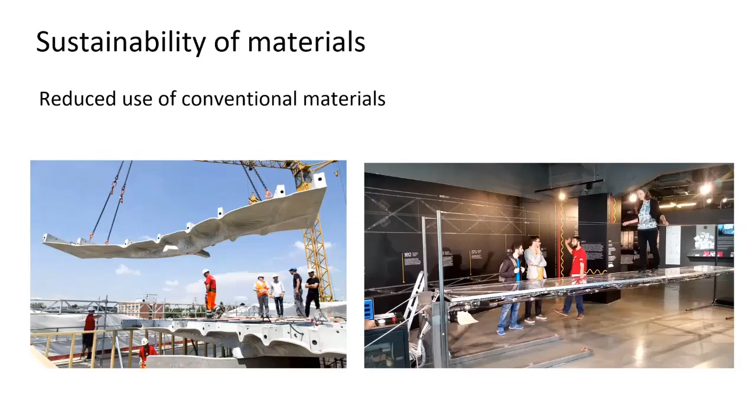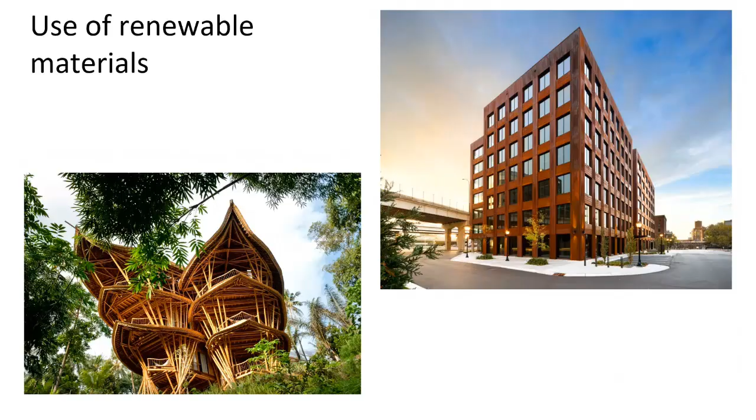So how do we currently design buildings sustainably? Well, we either use reduced use of conventional materials, so trying to design buildings optimally, reducing the amount of concrete and steel that we have in buildings, or we use renewable, sustainable materials, which really comes down to being timber type materials. And timber materials are inherently less stiff than the steel and concrete that we tend to use more of. So the combination of these optimized structures where we're removing material, using the minimum material that we need for strength, and using materials that are inherently less stiff means that structural design is increasingly governed by serviceability considerations rather than ultimate load considerations.

So although structural design is more governed by serviceability, so things like deflections and, more importantly in this context, vibrations, we don't really know what is an acceptable level of vibration. It really depends. As much as standards and guidance writers would like you to believe, there's no one value for what is an acceptable level of vibration. It depends on all sorts of things. It depends on the context, it depends on what you're doing. So someone in a dance studio is going to accept a very different level of vibration to a doctor in a surgery.

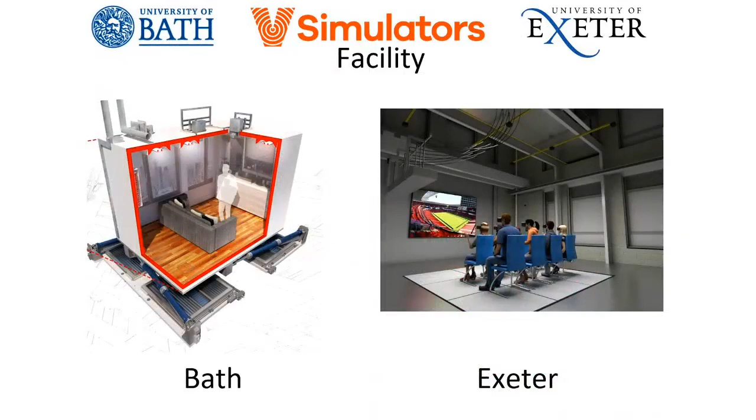So it's context dependent, and that includes the activities that you do, the surroundings, and all sorts of other environmental effects. So that is what VSimulators has been designed to look at, come up with rational design guidance for vibrations and motion in buildings and structures.

So it consists really of two bits of equipment, one bit which is housed at Bath and one bit which is housed at Exeter. And combined, they cover the full range of vibrations and are able to simulate that full range of vibrations that structures and buildings are subject to.

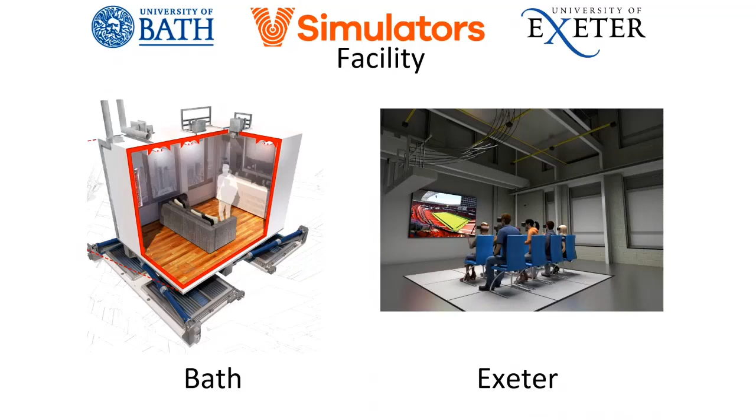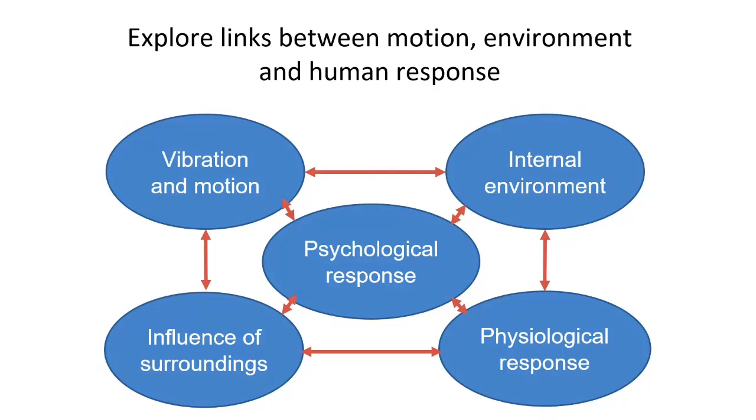And by combining that vibration and motion with aspects of the internal environment, the influence of surroundings that we use virtual reality to simulate, and testing people's psychological and physiological response to those different stimuli, that allows us to see how all these things link together and work out how people actually respond to that motion and vibration, and allow us to assess the acceptability of that vibration.

So I'm going to start off talking about the Bath VSimulator, which is a low frequency, long stroke biaxial motion simulator. So it's a big box on top of it that floats on top of these hydrostatic bearings, and is pushed by big actuators to produce this sort of large amplitude, low frequency vibration. And then that's coupled with an environmental chamber that allows us to control the internal environment and virtual reality.

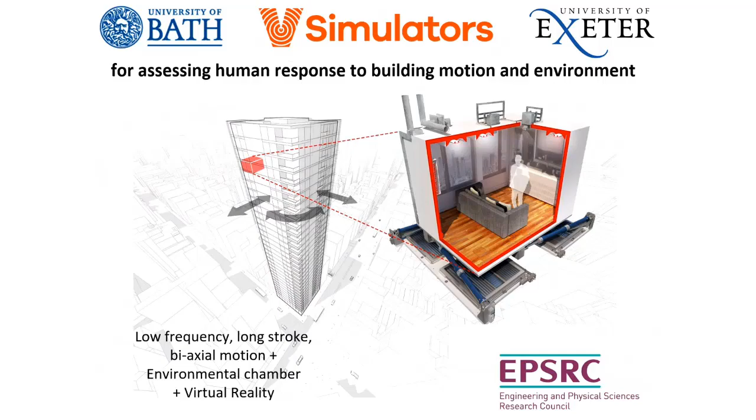So it's really designed to simulate this sort of low frequency, large amplitude motion that you will feel in tall buildings. I came across this in the Guardian: Wasteful, damaging and outmoded, is it time to stop building skyscrapers?

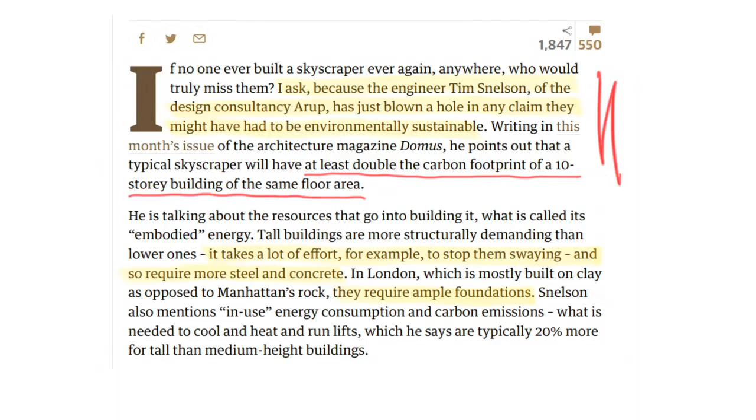So the reason behind that statement was that to ensure that we have sufficient stiffness in our structures to prevent those large amplitude vibrations, you end up with about double the carbon footprint compared to a 10-story building of the same floor area when we start going up higher. So is it sustainable? Okay, well that's a good argument, and that's why we need to look at what are acceptable levels of vibration, because we're designing these things to certain standards, but is it fine or isn't it fine?

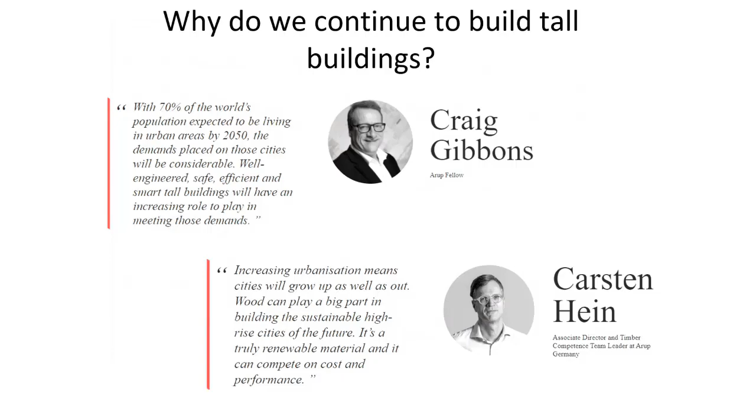And then this other quote is saying that wood can play a big part in building sustainable high-rise cities of the future, because it is a truly renewable material. And we're starting to see these tall timber buildings. So the building on the right there is the world's tallest timber building, 18 stories, 85 meters high, made of CLT. Slightly perversely, the top 5 stories have concrete floors, and that was introduced because of the dynamic response of that structure.

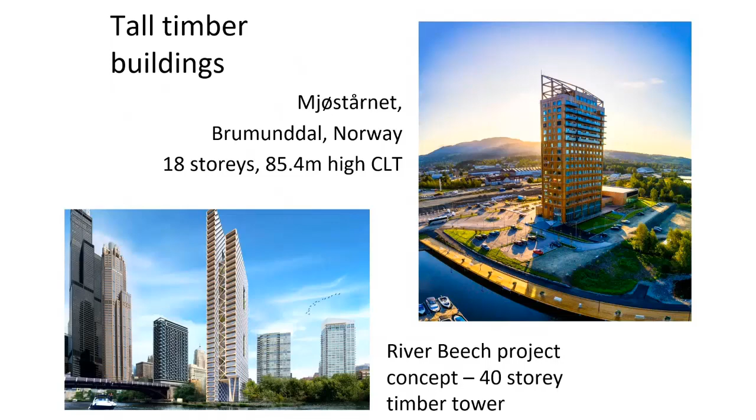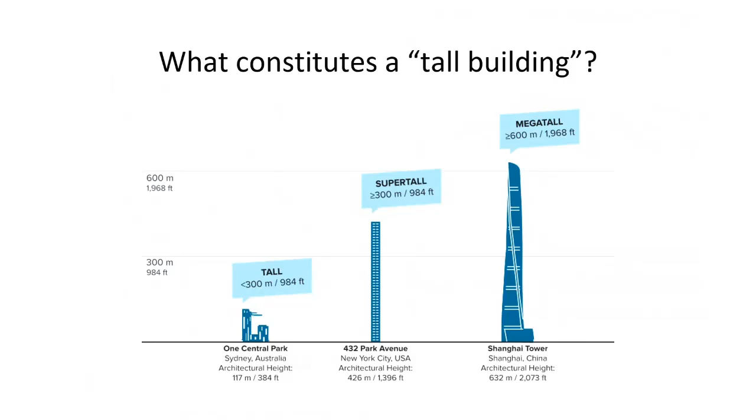So it's trying to increase the inertial mass of that structure so it's not as prone to swaying in the wind. But regardless of that, it sways about 140 millimeters in strong winds. And I'll come back to that building a bit later on. And there's all sorts of plans for even taller buildings than that using timber. So I'm not necessarily talking about these super tall, mega tall skyscrapers; even fairly modest buildings, 14 stories and up, would be considered a tall building and suffer from these problems of sway and vibration.

So I'm just going to talk a little bit about the history of motion simulators. The modern era of tall building design really started in 1972 with the World Trade Centers. Up to that point, the skyscrapers that existed were pretty massive, very heavy, pretty stiff. So the Empire State Building, which famously was the tallest building in the world for decades, sways about 200 millimeters from side to side in 100 mile an hour winds.

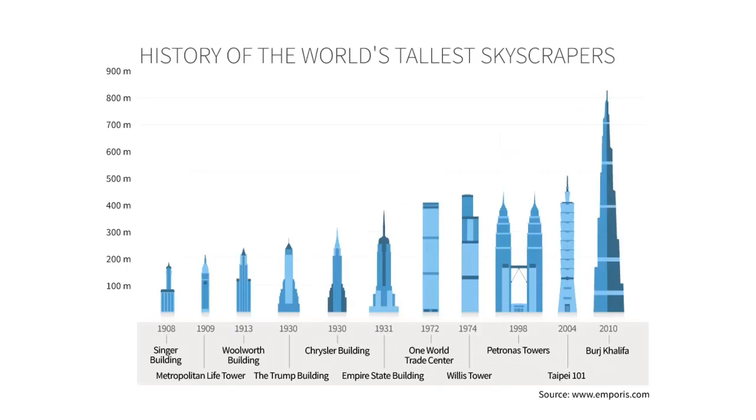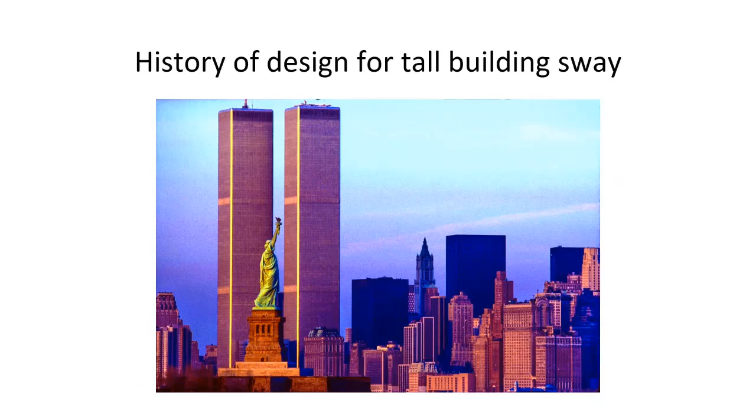World Trade Center, they were worried about this. This was much taller and a lot less stiff in terms of building design, a much more lightweight structure to go that tall. And so they were one of the first building designers to do wind tunnel testing on tall buildings. So they put it in this wind tunnel, subjected it to 150 mile an hour winds, and the models moved by about 25 millimeters, which scaled up translated to about 12 meters of sway at the top of that building.

So they realized that this was going to be completely unacceptable, but what they didn't know was what is acceptable, what is an acceptable level of vibration. So they built the world's first motion simulator specifically to look at sway in tall buildings.

They actually built two of them. This is the second of them. It's not a great image, but it was basically a box hanging from cables, I think about 50 feet long, inside a ventilation shaft in a tunnel. It was guided by bicycle wheels on the wall of this shaft, and some big hefty people pushed it from the outside and swung it from side to side.

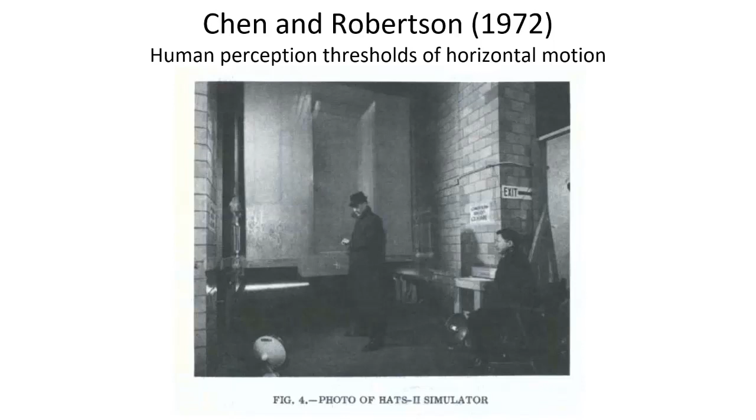There were people inside who didn't necessarily know they were being tested for vibration. This was one of the first tests to try and ascertain whether people would suddenly realize something wasn't quite right. So they got them to do these eye tests and things like that, so that's what they thought they were doing. And then eventually they realized that something wasn't right with this room.

This pioneering work demonstrated a few things that are commonly known today. First of all, the period of vibration affects the level at which you perceive that motion, regardless of the acceleration. The acceleration where you perceive the vibration changes with that frequency or period.

Whether you're standing up or walking makes a big difference to how you perceive the vibration, and whether you have prior knowledge that you're in a building that's going to vibrate affects your perception levels. The perception levels were much higher when they didn't know the building was going to vibrate, compared to afterwards, when they were told that they were going to move and they were ready, to measure their threshold.

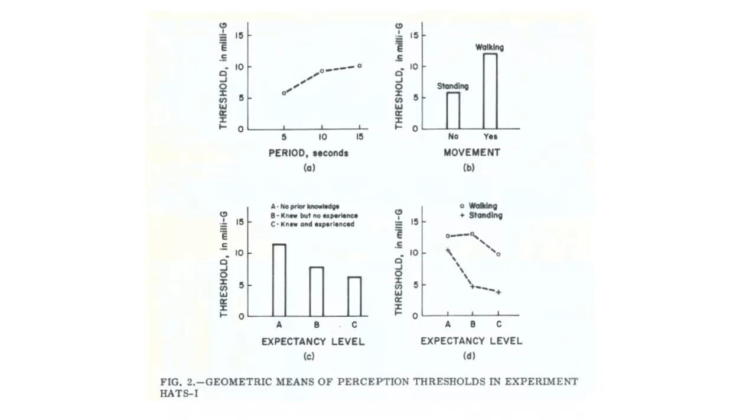Eventually they fixed the problem with the vibration of the World Trade Centers by putting in 10,000 dampers. They had these little viscoelastic dampers in each floor, 100 per floor, and that reduced the accelerations that people would feel to about 16 milli-g. So it's 0.016 of the acceleration due to gravity, which is still pretty high, but that's under extremely high wind loads.

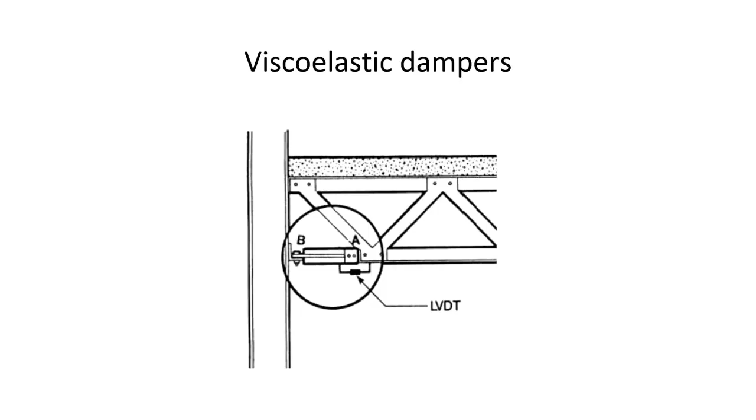Since that work, there's been a lot more work. Ideally, we'd want to be testing people in buildings, and there are plenty of buildings that have sway problems, but getting access to them and the people in them is incredibly difficult, as you can imagine. So motion simulators are a good way of simulating that motion in a controlled way and testing people. This has been going on since the 1980s with more complex motion simulators.

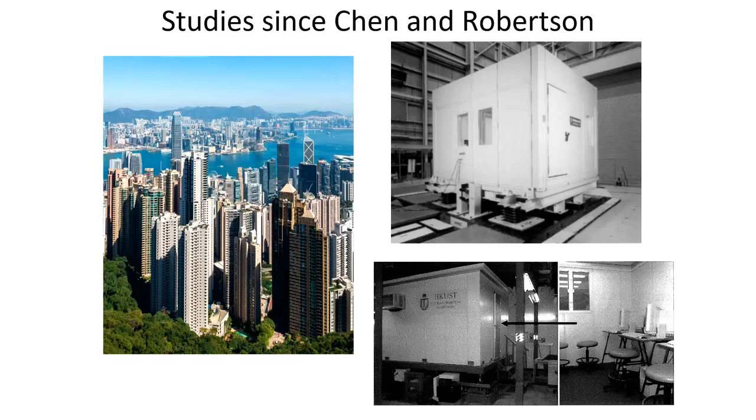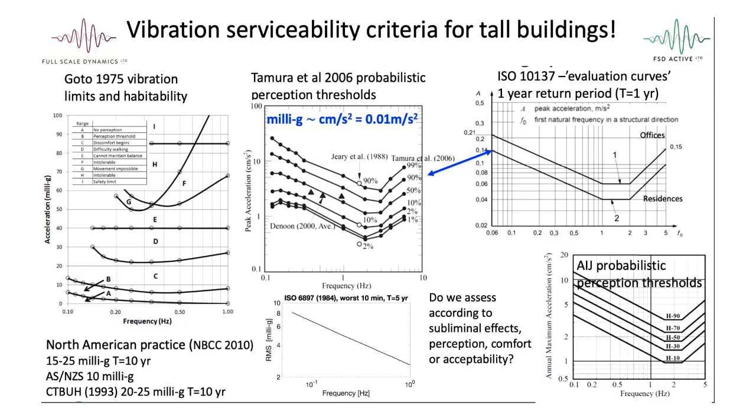This has led to various vibration serviceability criteria. There's loads of different stuff, but it all goes back to this very early work on perception thresholds. Pretty much all of the design serviceability criteria are based on perception thresholds. They're not really based on whether that motion is acceptable or not. And there's a lot of conflicting information out there that makes it difficult to work out what the definitive criteria is. The point is there's probably no definitive criteria. It will depend.

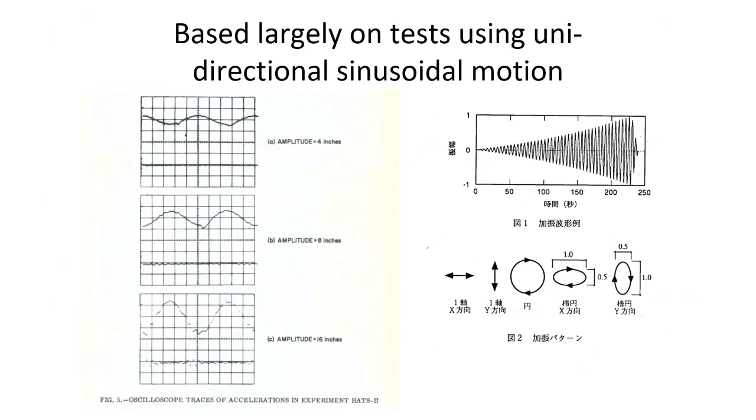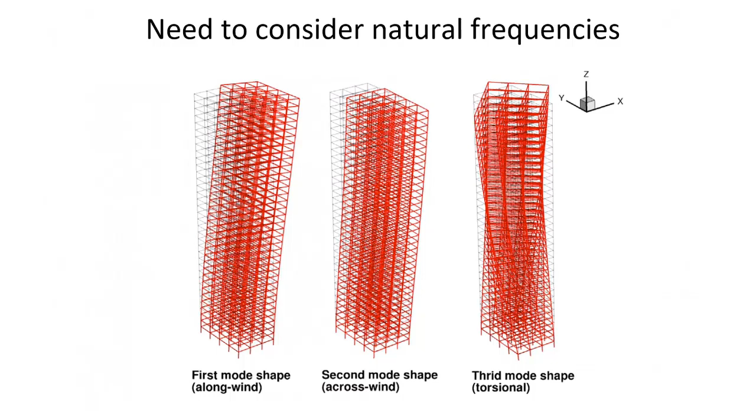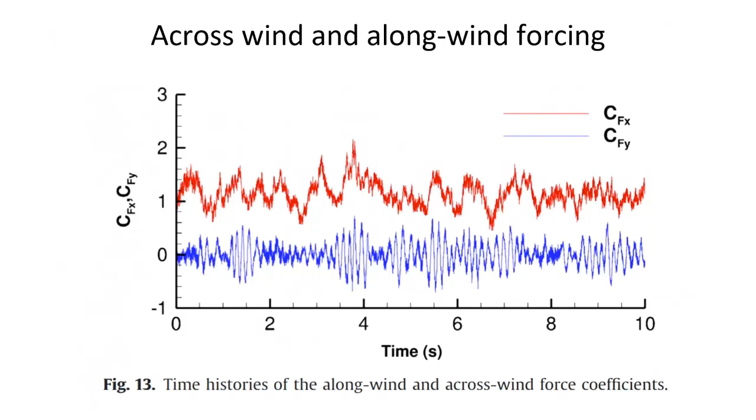So what is wrong with current guidance then? First of all, it is based on these perception thresholds, which are based on either unidirectional sinusoidal motion or elliptical or circular sinusoidal motion, which is really handy for defining perception thresholds, but it doesn't resemble the sorts of motion that you feel in practice. You need to consider that you have different natural frequencies in different directions in your building. The wind is not constant loading, so it doesn't produce this constant sinusoidal motion, even if that was what the building wanted to do.

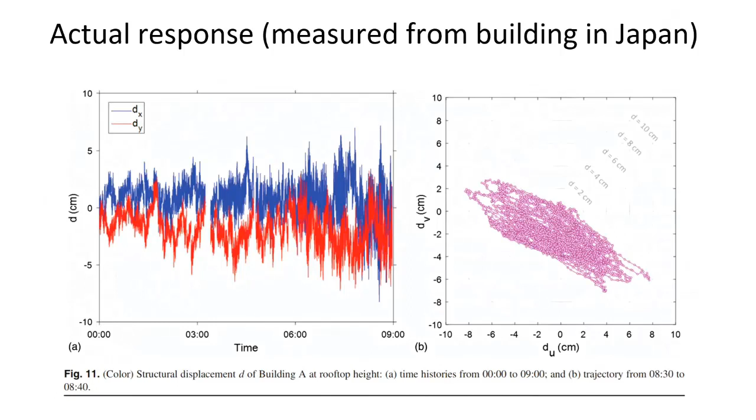When you actually measure the response of buildings, it's very far from being sinusoidal in nature. That's some actual measured displacement motion from a building in Japan, and you can see it's neither elliptical nor sinusoidal. So it really doesn't represent the type of motion that you're feeling in a building.

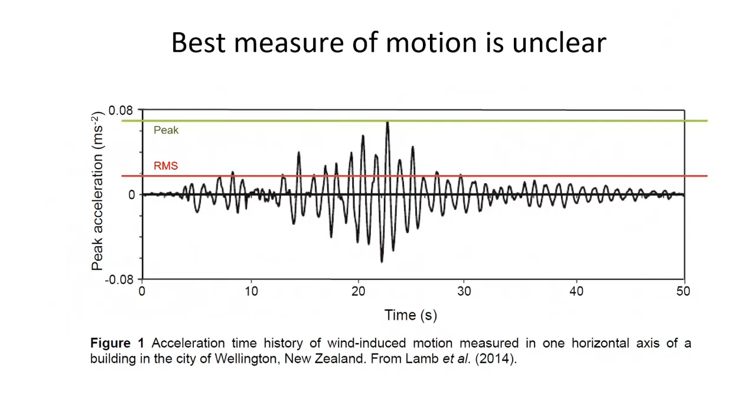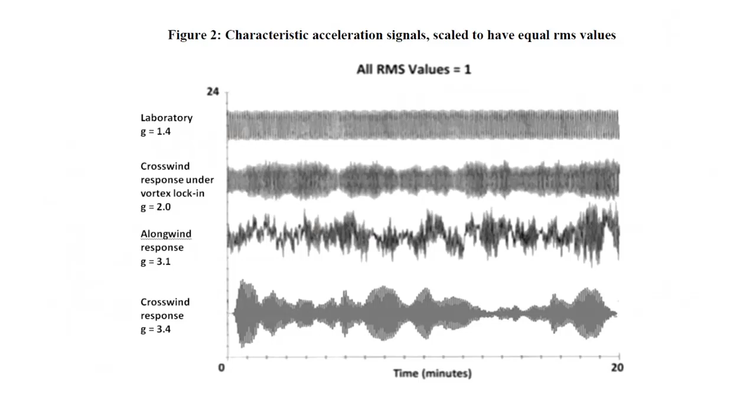Secondly, what is the best measure of motion? Some guidance documents say peak, some say RMS, root mean squared motion. Should we be using a peak acceleration that you feel very infrequently, or should we be using root mean squared motion? If we look at this, sorry, it's a very blurry picture, but all of those motions have the same RMS value, but the quality of that motion is completely different. So again, it doesn't really tell you anything about the sort of motion that you're feeling.

And then things like exposure, habituation, and there's something called sopite syndrome, which was discovered by NASA scientists, that sustained exposure to this sort of gentle swaying motion causes the onset of motion sickness type and tiredness and lethargy type symptoms. So it's the same sort of motion that we use to rock children to sleep. So it's inbuilt with us to feel tired and lethargic when we have this low frequency motion. And that might be fine at home if you're feeling tired, but it's probably less fine if you're at work.

And then context dependency. So there's the ISO 10137, which is probably the standard that most people refer to when looking at tall buildings, has a sort of nod to this context dependency by having two different levels of vibration acceptability for residences and offices. So in this graph, you've got frequency along the bottom axis there, and you've got peak acceleration, acceptable levels along the y-axis. So it's suggesting that at residences, you should have a lower acceptance criteria than for offices.

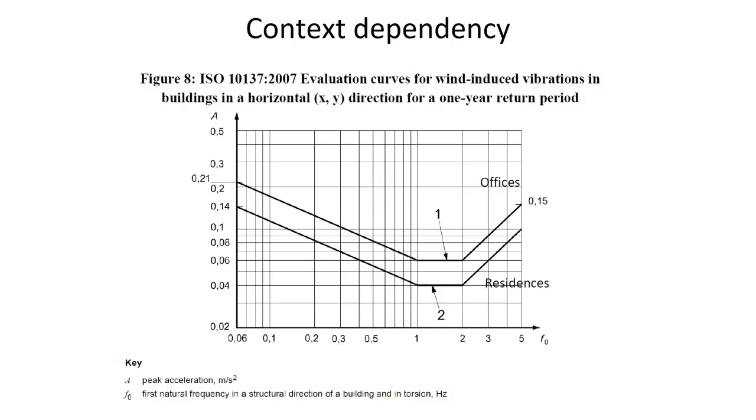And the only reason for that is that someone's thought to themselves, well, we spend 2/3 of our time at home, 1/3 of our time in the office, so we ought to have a more stringent criteria at home because we spend more time there. That makes no sense whatsoever. We do completely different things in those two environments. In an office space, it's fairly sedentary and we're having to concentrate on particular work tasks. Whereas at home, we're doing all sorts of different things. Half the time we're asleep, half the time we're cooking or watching television or whatever we might be doing. So it doesn't really capture that context dependency in a meaningful way.

And then all this motion simulator work has been done deliberately just looking at the motion itself without looking at other cues to indicate vibration. So buildings do creak when they sway. Using perception thresholds as a proxy for acceptability in buildings just doesn't make any sense. So James Brownjohn always hates it when I use this analogy, but I'm going to use it anyway. I think it holds up.

So if you consider train travel, we expect there to be vibrations and motion. We expect to be rocked from side to side, accelerating and decelerating. Does that mean that it's not acceptable just because we can perceive it? Well, of course not. But it may cause us to go to sleep, and that might be fine. A lot of people fall asleep on the train. It might be fine in the morning or leaving work, but it might not be fine, again, if you're trying to work on the train.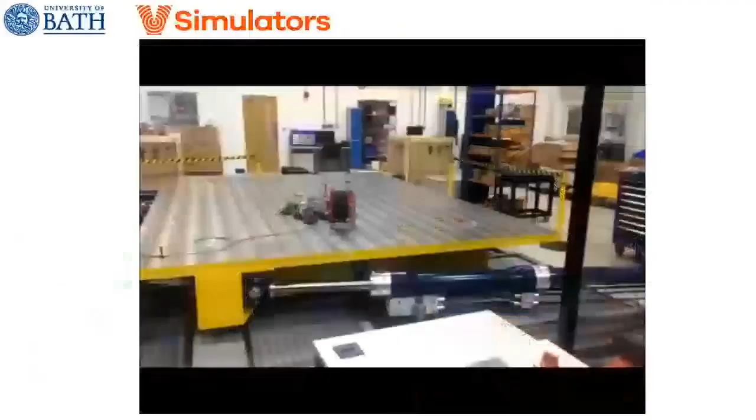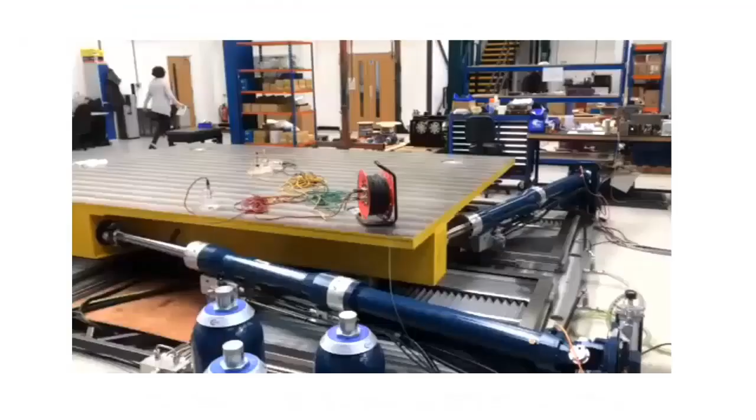So this is what the Bath VSimulator has been designed to simulate. So it's this large amplitude vibration. So this is from our factory acceptance testing. This is the actual platform. So that's showing the extent of the motions that we can simulate. And this is showing that this is doing some sort of elliptical motion. As I say, that's not necessarily typical of what actual motion is in a building, but it can replicate the sort of motion that you do feel in a building.

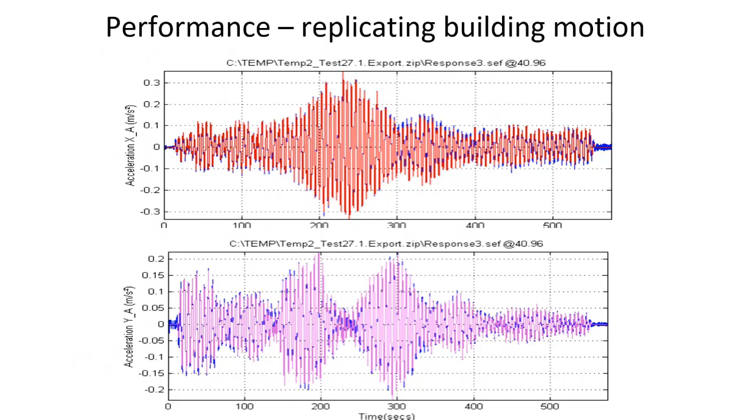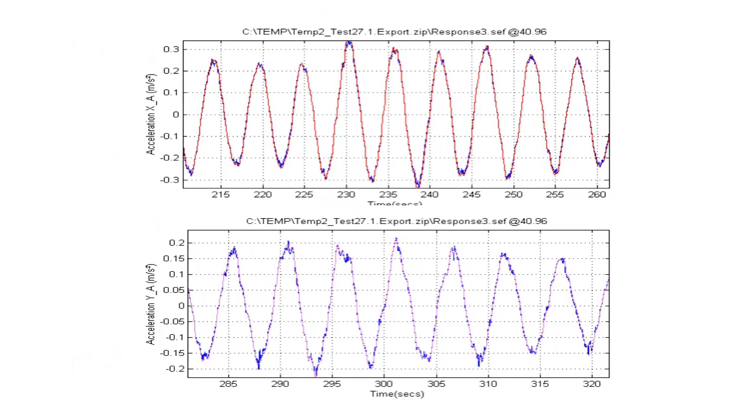So the red there is the desired response from a measured building response, and the blue is what we're simulating there. And so if we zoom in there, we can see that we can match that pretty well. We can pick up the higher frequency components of that vibration and be able to replicate that pretty well.

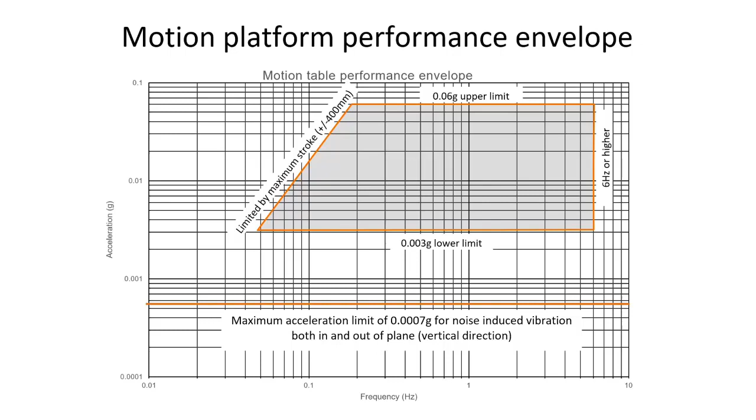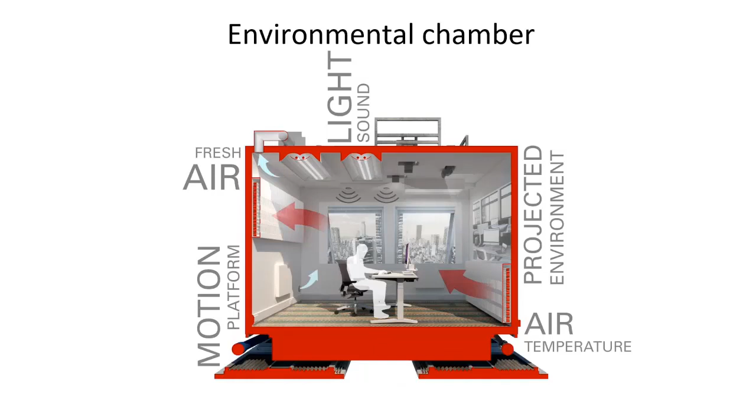And then added to that, we've got this projected virtual reality in the case of the Bath VSimulator. So that allows people to do sort of work activities and things and still have a feeling of being in a larger space. So we have an open plan office building, a modern apartment building, so we can simulate those sort of two different types of scenarios.

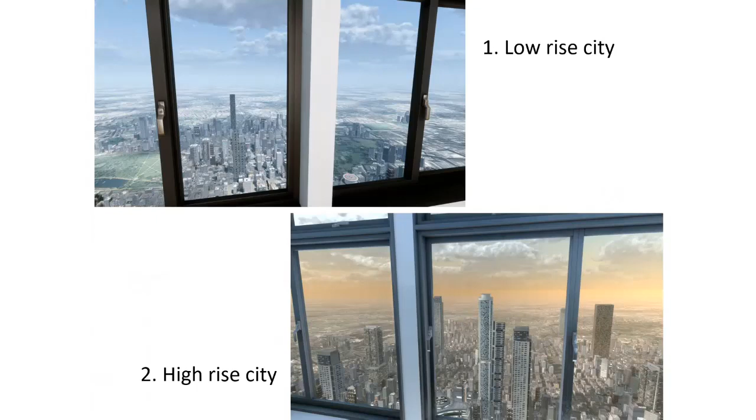We can change the view outside, so a low-rise city or a high-rise city. We can change the time of day from night to day, and we can change the height that we are in the building as well. So all of these things that influence your perception of vibration, and more importantly, the acceptability of that vibration.

And alongside that, as said, we can measure the physiological and psychological response of people. So we wire people up to all sorts of physiological measurement things and get them to do sort of work tasks and see how they perform in those work tasks. So our current tall building motion research that we've been doing fairly recently has been looking at how people do respond to these motions.

So we subjected people to high acceleration motion, to medium acceleration motion, and to low acceleration motion at two different frequencies, two natural frequency buildings, one which was 0.2 and one which was 0.5 hertz. So we started off with the highest acceleration being 12 milli-g. That was a peak acceleration, and people were feeling sick. So we had to reduce it a bit. So we moved it down to 10 milli-g, and we didn't have any more complaints about people feeling sick. But that tells you something about the sorts of level of motion that's already there, not necessarily acceptable to a lot of people.

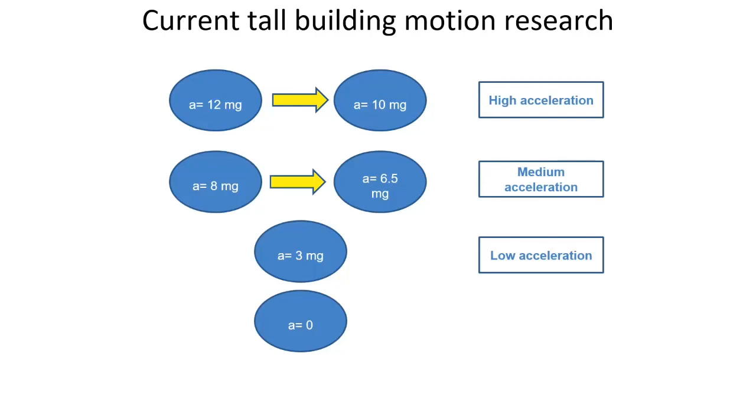And we also had a control test where we didn't subject them to any motion, and we just did this in a random order, so they didn't know what motions they were experiencing. And it wasn't just sinusoidal motion. We were putting in this sort of simulated real building motion and it was in two degrees of freedom. It wasn't just in one degree of freedom as well.

So this is fairly typical. So this is for a 6.5 milli-g peak acceleration with a peak factor, so that's the ratio of the peak response to the RMS response, of 3.5, which is fairly typical for building motion. And it sort of repeats itself every couple of minutes.

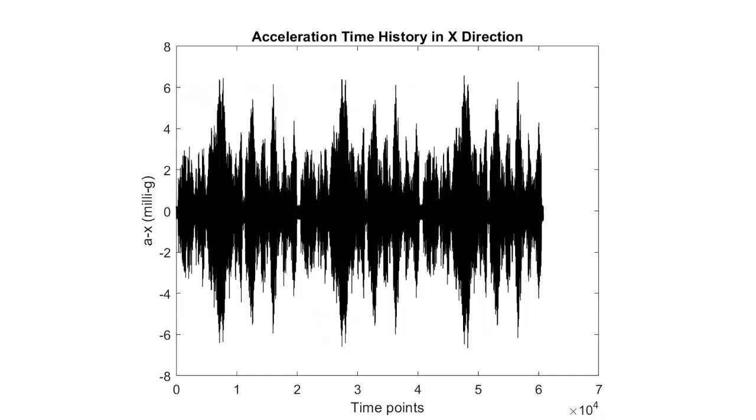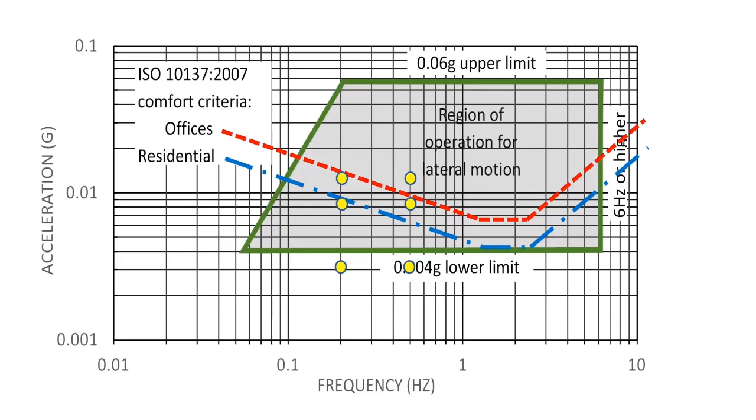And this shows those acceleration points on our acceleration frequency graph in comparison with those so-called comfort criteria from ISO 10137. So you can see that most of those are below the criteria for offices, and some of them are below the ones that they've defined for residential buildings there. So those are the yellow dots for the actual peak accelerations that we exposed people to.

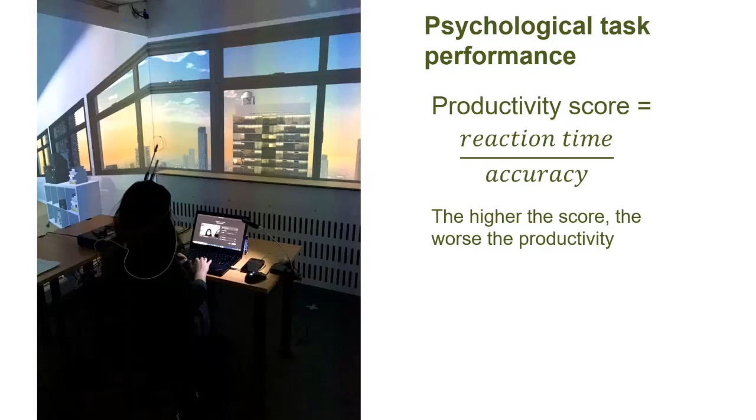And then we got them to do various psychological tasks, which measured various cognitive abilities. And at the end of those tasks, we produced what we call a productivity score. So that's the reaction time, basically how quickly you do these tasks, divided by the accuracy. So a higher score indicates lower productivity. Okay, higher productivity score means a lower productivity.

And so these are the results. So let me just explain what these graphs are. So on the vertical axes, that's your productivity score. And along the x-axis for each of these, that is the frequency. So we have 0 frequency, so no motion, on the far left, and then 0.2 hertz and then 0.5 hertz. And of those graphs, the one on the left is high accelerations, the one in the middle medium accelerations, these are peak accelerations, and the one on the right are the low accelerations.

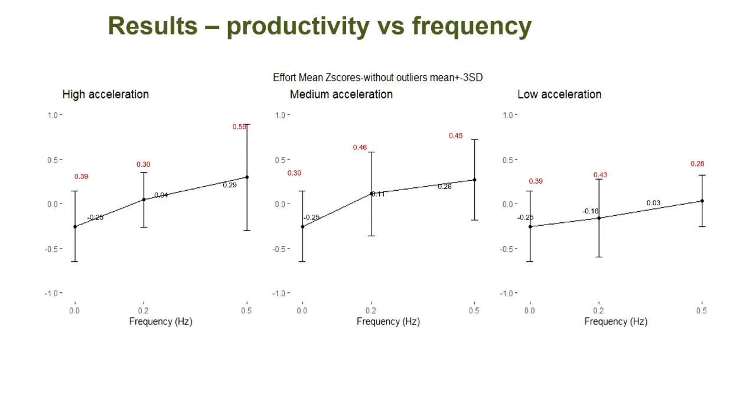And so you can see that there's a deterioration regardless of whether you got high or low accelerations when you have motion. Okay, and as I say, people weren't prompted as to whether or not there was motion going on, and some of these were below the perception threshold that people would actually perceive. And as you would imagine, for the higher accelerations, the productivity was worse than with low accelerations. But regardless, even though you couldn't necessarily perceive those vibrations, there was a deterioration in your productivity. And then we did these sort of longer term tests.

So those were quite short-term tests. These were longer-term tests where we exposed people for 2 or 3 hours to sub-perception threshold motion. So people couldn't feel this motion, and I experienced it myself. I couldn't tell when we were moving and when we weren't moving. And half the people were subject to no motion, and half of them were subject to motion.

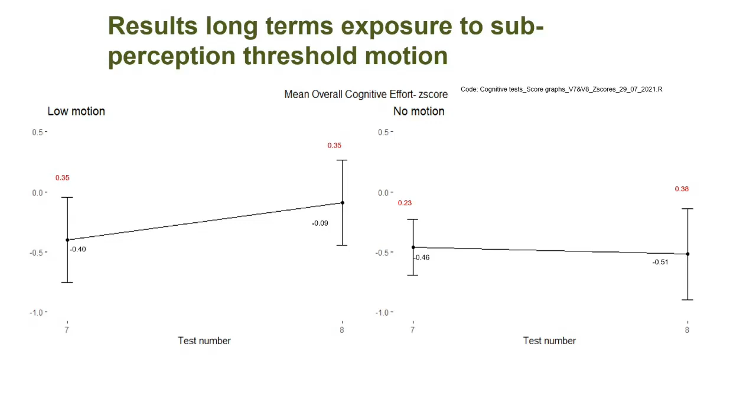And again, we tried to see over time whether there'd be a deterioration in your performance for these work tasks. And again, we showed that when there was no motion, there was hardly any deterioration or hardly any change in your performance. But with the low motion, at the end of the test your performance for these work tasks was worse than at the beginning. Okay, so that indicates that this sopite syndrome thing exists.

So you can see again, just from people's own perception of how they performed for a particular task for these different acceleration levels, people thought that their work performance was also getting worse. And it almost mirrors exactly what I showed previously. So those are the previous ones from the actual objective measurements from their performance in these tasks and their subjective evaluation of their performance.

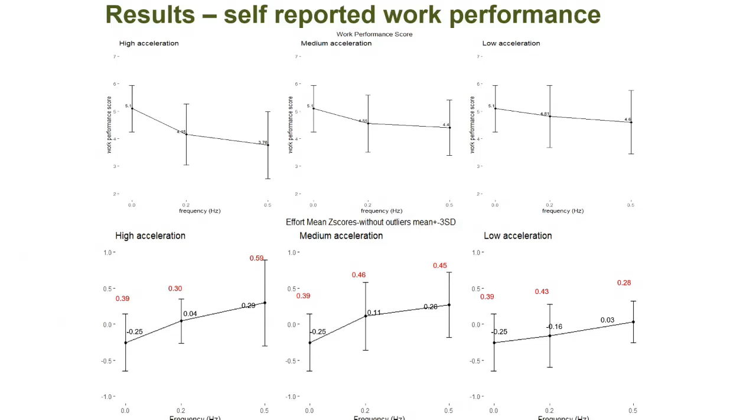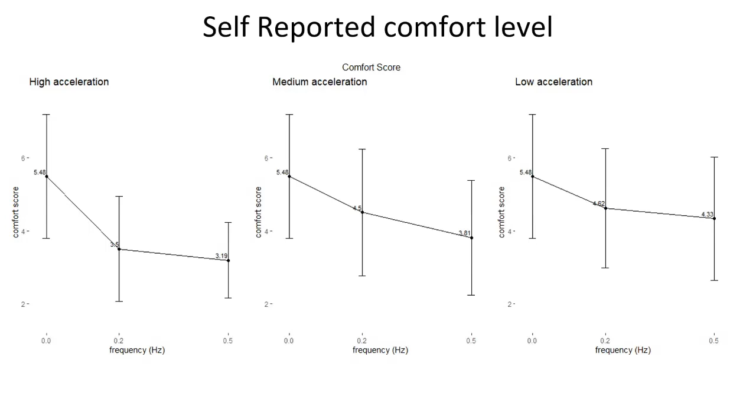So that's the current research, and that's something we're looking at in more depth in these tall buildings, because we know now that even if you meet the current criteria, it doesn't necessarily mean that your building is okay.

Okay, now I'm going to talk about the Exeter facility. So the Exeter facility is looking at a different range of vibrations. James Brownjohn gave me this presentation, so I'm going to try and make sense of what he's trying to say in his slides. So forgive me, James, if you're watching, if I don't put this across quite how you wanted it to. But I'll try and guide you through this.

So the Exeter VSimulator is a 6 degree of freedom simulator, whereas the Bath one only moves laterally in 2 degrees of freedom. This can move up and down, it can move side to side, and it can roll, pitch and yaw. So 6 degrees of freedom, but much smaller vibrations. I think it can move up to about plus or minus 21 millimeters as a maximum. But importantly, it can go down to micron level vibrations, so down to 5 microns or possibly even less than that.

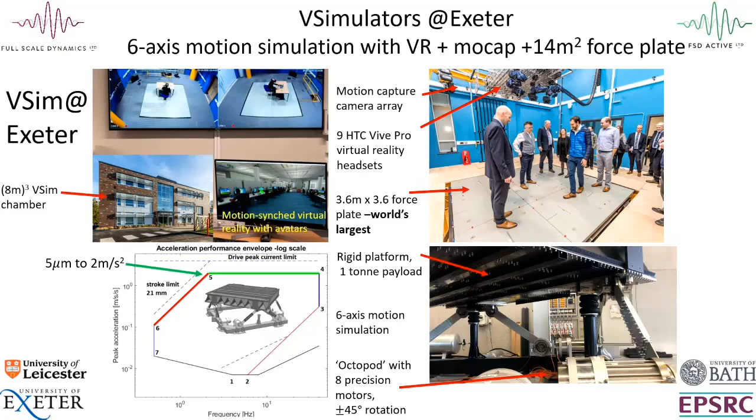Human perception of vibration is increasingly governing design. Serviceability and human comfort has become governing. Vibration serviceability is a design driver. Acceleration, response, and habitability performance of tall buildings can cost firms millions. Embodied energy is then driven by these vibration effects. So it's clearly a really important driver for everything that we're doing with these simulators.

Coming back to tall buildings, say with medium high-rise buildings, the Exeter facility can simulate some of these shorter tall buildings, for want of a better description. But we know that design codes are contradictory and not necessarily appropriate. It doesn't give you an appropriate level of vibration. And it's really the end users that we need to be looking to. And if we end up with buildings that don't meet the criteria, that are unacceptable, then it's going to be very expensive and very unsustainable to try and fix, and we might not even be able to fix them satisfactorily.

And I say that current vibration guidance just doesn't consider all the other environmental effects. So these are two buildings that Exeter have been looking at, and they've been shaking those buildings and working out how they respond. Both of those are fairly flexible buildings, and they're timber buildings, and they are particularly prone to vibrations. And so those are the sort of things that we want to be looking at.

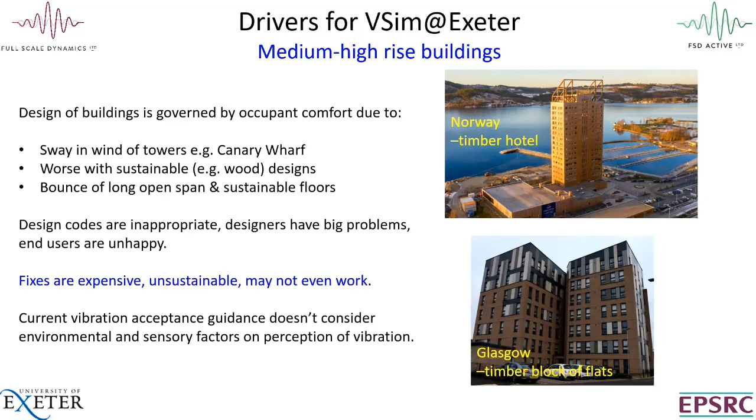And then, of course, things like lightweight footbridges. We all know that they are particularly susceptible to human-induced vibrations. So understanding both vertical and sway vibrations of, sorry, not buildings, but bridges, and trying to sort those out is another key driver, particularly for that Exeter VSimulator, which can simulate all of those different types of motion.

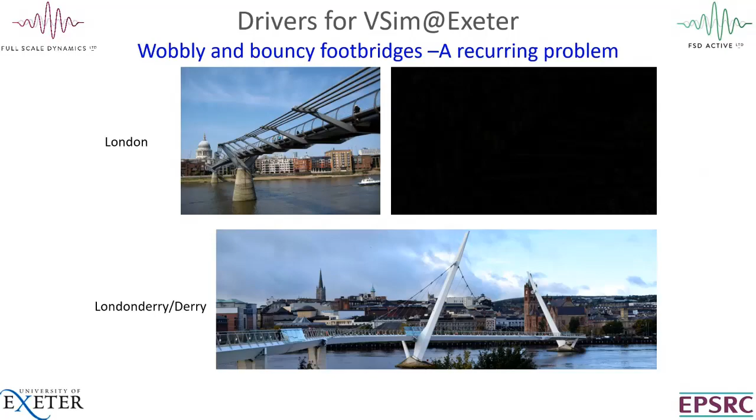Floors. Okay, and this is a big thing. Lively floors in buildings. And I think this is one of the main drivers for the Exeter VSimulators: understanding how floors respond to vibrations and coming up with solutions to prevent that vibration. So they've done a lot of work on these very low profile active mass dampers that they can put in floors and prevent vibrations. But there's been numerous floors that Exeter have looked at which are problematic, particularly in things like hospitals.

And this has all been picked up in the Design for Zero. So I don't know if you've come across this. It's been recently published online and in paper copy as well. Doesn't seem a very sustainable thing to do.

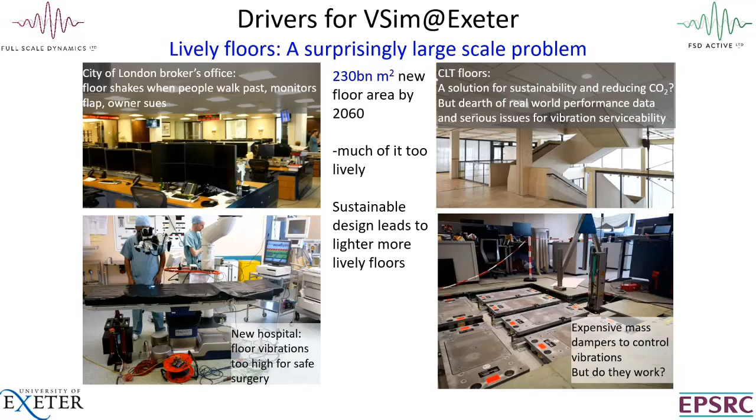Never mind. So the IStructE have published this guidance, Design for Zero, thinking about how we can get to our targets for net zero buildings. And as part of that, they recognise that as we build these optimized, lighter buildings, using less material, using less stiff material, serviceability requirements are going to govern their design. And they recognise that serviceability criteria aren't necessarily appropriate, and are our sway limits really fit for purpose in terms of well-being, comfort, productivity of occupants? So we need this evidence-based design for these future buildings.

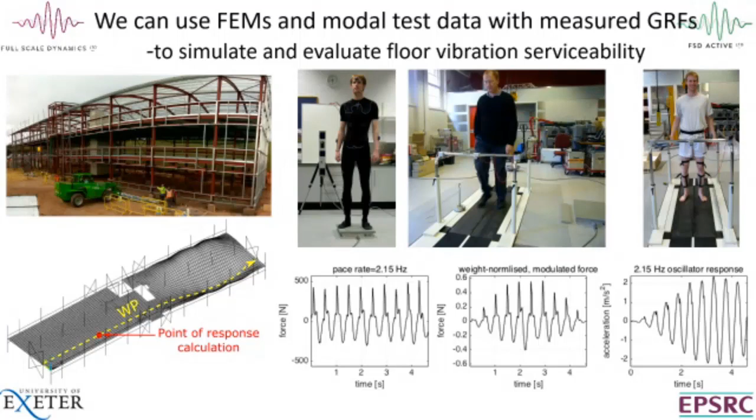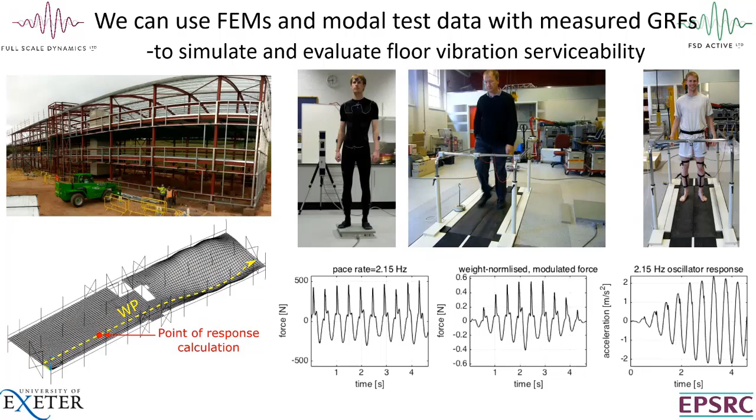Okay, so this is talking about walking data, so how people actually interact with these lively floors and lively bridges, and Exeter have very good data on the forcing that people apply to structures, and that allows them to model those structures and replicate the motion of those structures using VSimulator.

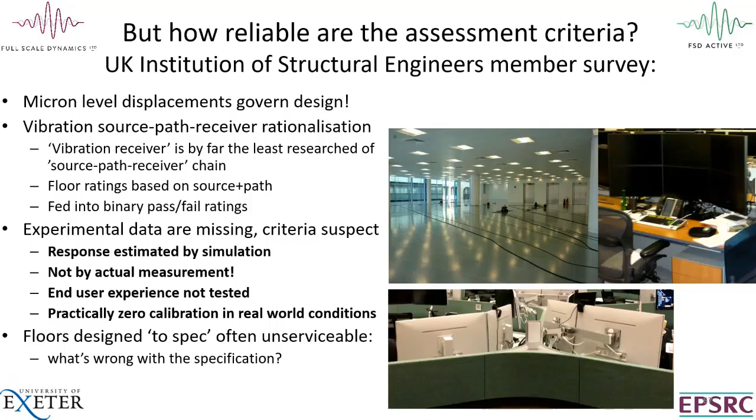And thinking about these assessment criteria, we understand very well how to model the source of vibration. We understand how to measure the response of the structure to that source of vibration, but the receiver, us, that's the bit that we don't understand. And so that's the missing link that we're trying to fill with these simulators. And so we're in the situation now that floors that are designed to the current specification actually in reality are not serviceable. So what is wrong with that specification?

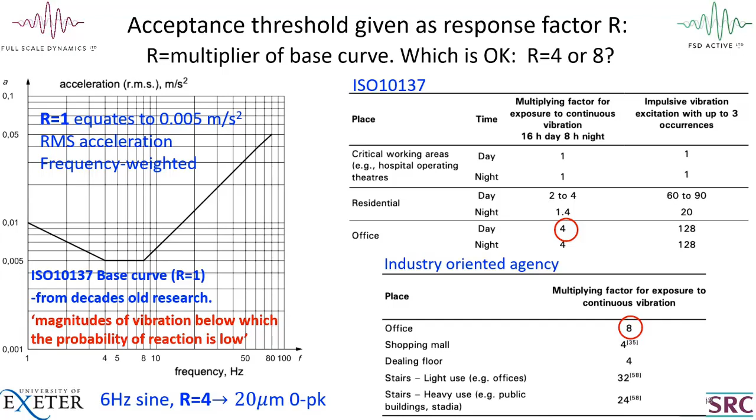So these are two different guidance documents that have completely different response factors for the same thing. One is 4 and one is a response factor of 8. So which are you going to choose? Well, you're going to choose the one that is easier to meet, the response factor of 8. But if you use that, is that going to be acceptable in the real world? Well, quite possibly not.

Yet we're designing to these very rare occurrences, so once in 5 year return periods for wind loading, which might be 18 milli-G, might be acceptable, but those happen very rarely. These things happen every day, and people are still feeling them. So should we be using these very rare events, or should we be using the typical daily events to design our buildings? So what is that return period that we should be using?

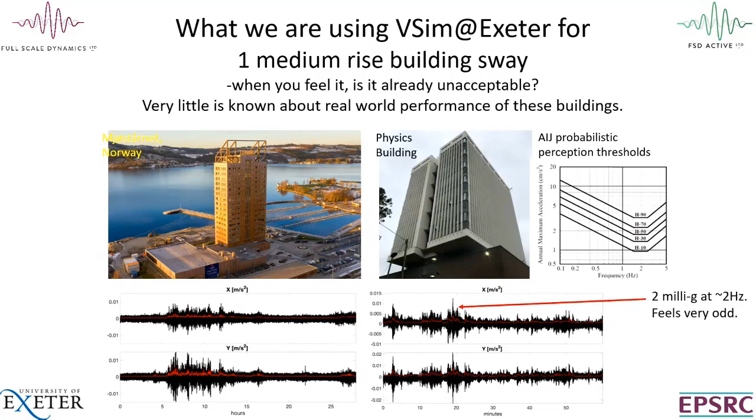And then you can replay that on the VSim@Exeter simulator, with the 360 video. I don't think that was actually implemented, but we can do that now. So you can feel like you're in the space, feel the vibrations in the space, and then do proper controlled studies of how it feels to be in that environment, and again, what is an acceptable level of vibration.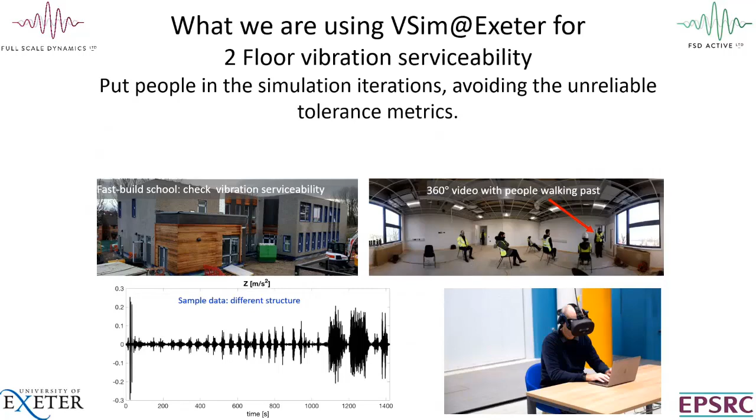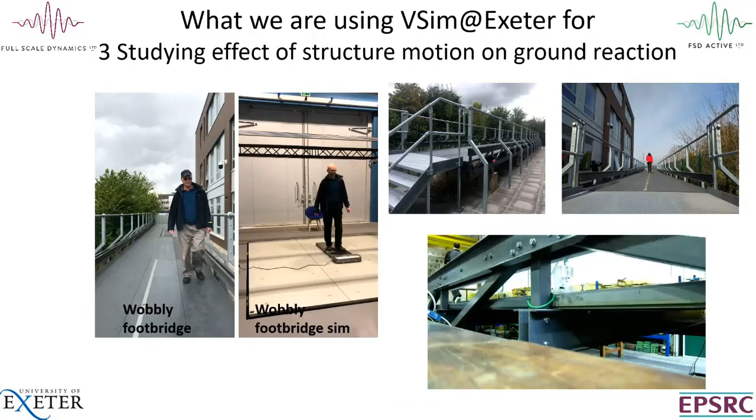Okay, and then this is looking at a wobbly footbridge. So this is some work that's been going on at Exeter on fibre reinforced polymer footbridges. This is a very lively footbridge, as you can see. We measure response as you're walking along it, and then we can simulate exactly what it's like walking along this bridge on the simulator. And again, you've got a more controlled environment to do proper studies of what's acceptable or not. And you can replicate almost any sort of vibration like that.

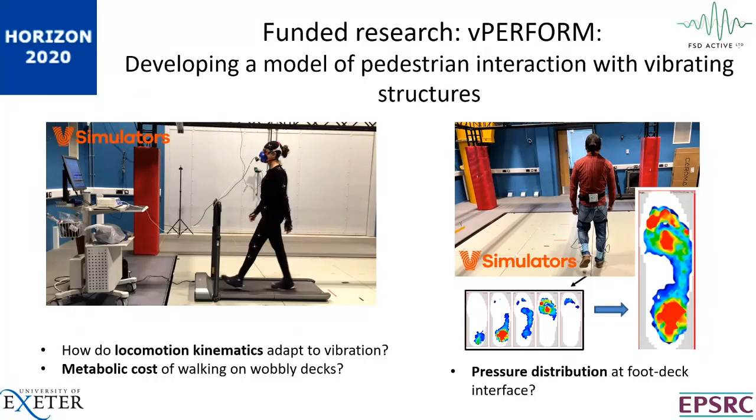So I know that James has measurements from buses, boats, and trains as well, so you can simulate the vibrations that you feel in those environments.

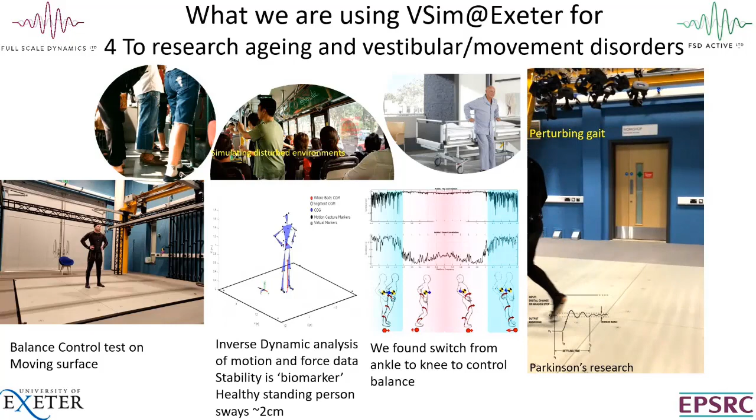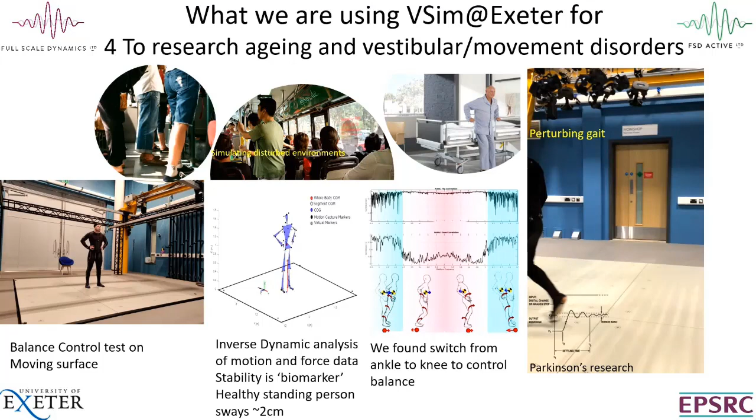And then one big thing that Exeter started to look at is applying it to health situations. So that was a little video. I'll play it again, and if you just look, I'll have to go back and, okay, just look at that bottom left. Oh, actually, you didn't see it. It just did a little perturbation sideways, only a very small amount, and it was looking at how you can lose balance. And those sorts of things become really important, particularly for aging populations and people with movement disorders. So there's a lot of health research and mobility research that can be explored using the simulator.

And this was a little bit of research looking at evaluating the capability of portable shakers to test buildings. So to get a building to start moving, one thing you can do is get a great big shaker, big mass, and move that mass and get the structure moving, or you can get a whole load of people in the building to move at the same time at the natural frequency of the building, and you can get the building moving quite a lot by doing that if it's a flexible enough building.

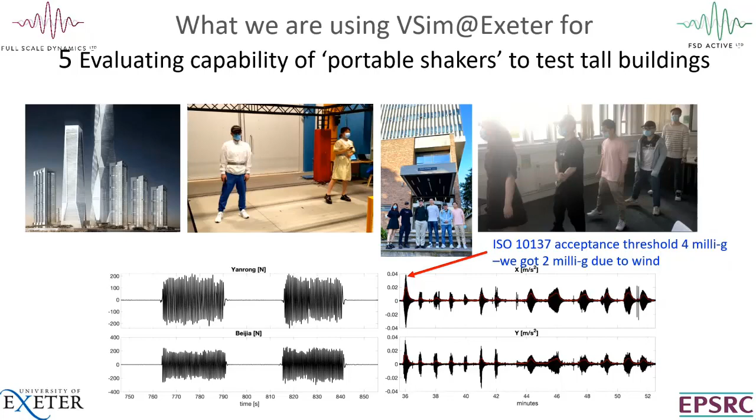And then lastly, looking at commercial applications. So both for the Bath V simulator, the tall building simulator, and the Exeter V simulator, we're very keen to explore commercial applications. So using the V simulators for clients and designers to actually experience these vibrations. So if I say 5 milli-G, what does 5 milli-G actually feel like? I guess most people don't actually know what it feels like.

So to get them to experience that and to think about that variation in duration of exposure to those different natural frequencies, to allow you to come up with design decisions and design criteria for your building.

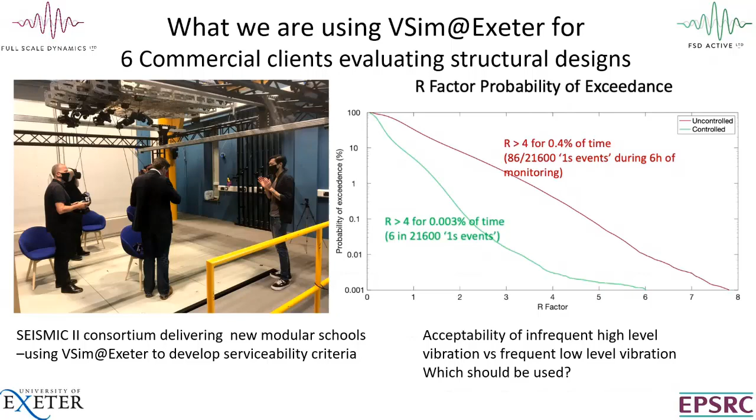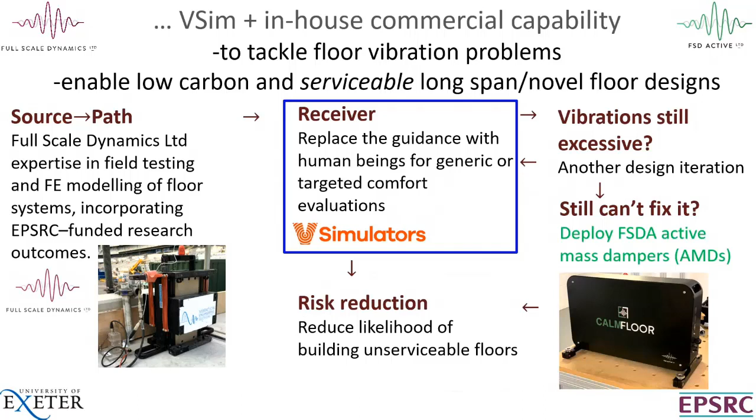Just one last thing, talking about the CALMFLOOR system, which is this sort of active damping system that can help with floors and so on. Okay, so just to sort of summarize then, sustainable construction practices need to consider the users of buildings. It's not good enough to just think about sustainability in isolation to meet these sort of sustainability criteria without thinking about the effect that that has on people, whether that's building vibration or whether that's to do with the internal environment or whatever.

It needs to focus on people's comfort, well-being and work performance, not perception thresholds. Okay, they're completely different things, and acceptability depends on that comfort, well-being and performance, not on perception. The VSimulators facilities have been specifically designed to explore these aspects and how these vibrations and environmental effects affect people, and that hopefully is going to lead to this context-dependent design criteria and help inform that sustainable development for the future.

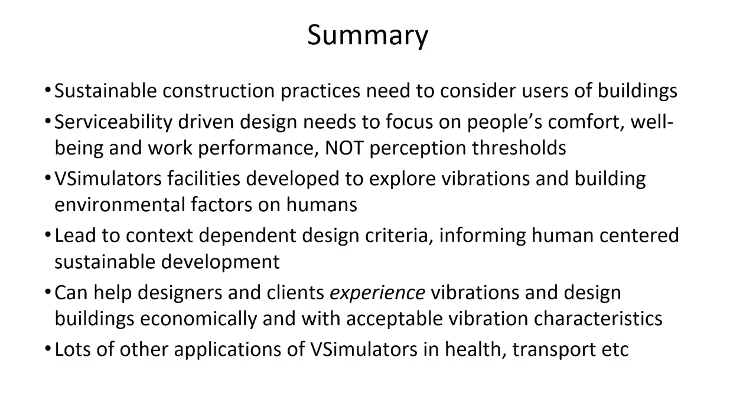We can help designers and clients to experience those vibrations and help them come up with economically viable solutions to meet those acceptable vibration characteristics. And as I say, there's all sorts of other applications outside of the world of structures that we can use these VSimulators for in health and transport and so on.